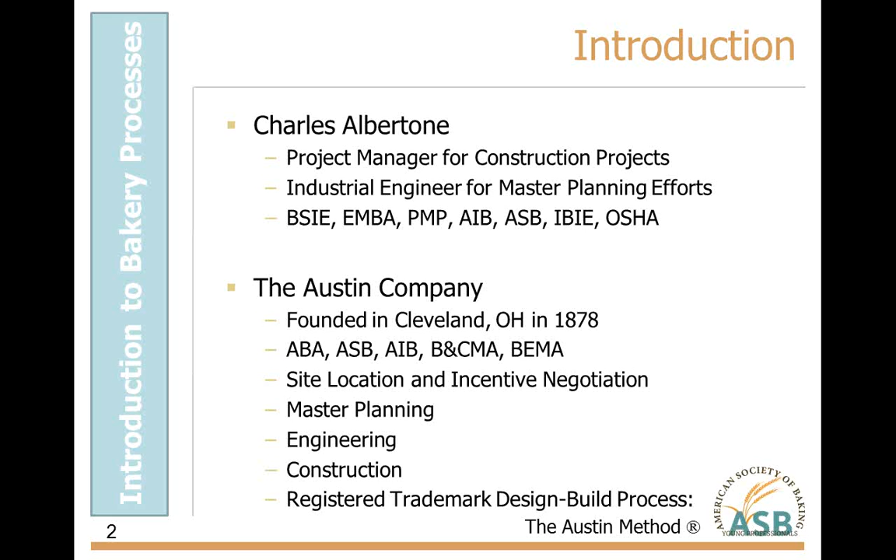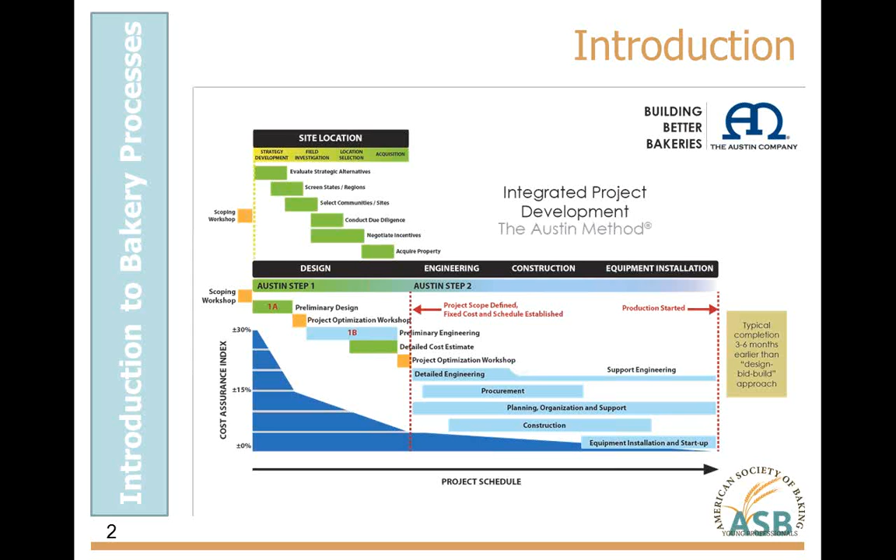The Austin Company, a few other things about it real quick. We do some site selection and incentive negotiation if you are planning on building a new facility. We will master plan that, starting with a blank sheet of paper, developing an ideal layout. Then you try to find a site or existing building as close as possible without making too many concessions. And then the Austin method that Brittany alluded to, essentially it's an integrated design build approach. It's a registered trademark process that we have, and it allows us to establish the guaranteed maximum price of a project after you've only expended up to maybe 10% of the engineering. Then we get started with engineering of items that are more critical in the field, such as footers and foundations, and we begin constructing those while we're still ironing out the final details of an office layout, for example. So it's just a way to get into the field quicker and get completed quicker so that you could start making more money.

This is a two-part agenda for today. One is going to be focusing on the bakery processes introduction, as the title indicates, and then also going to talk about construction items. Some of the key takeaways will be to understand the basic processes involved in making a bakery product, gaining knowledge on the different types of systems that can create a unique product, and introducing the fundamental ingredients and optional additives for recipes.

On the construction side, we'd really like you to gain an appreciation of the design and construction process of a standard bakery, that the site is more than just acquiring a piece of land, and designing the building is more than just creating a shell to house the process equipment. And then the actual field process itself is more than just executing the plans. It's ensuring that the sanitary details are being followed in accordance with scope, schedule, and cost for our clients. Throughout the presentation, I hope to be illustrating typical construction details to consider where applicable.

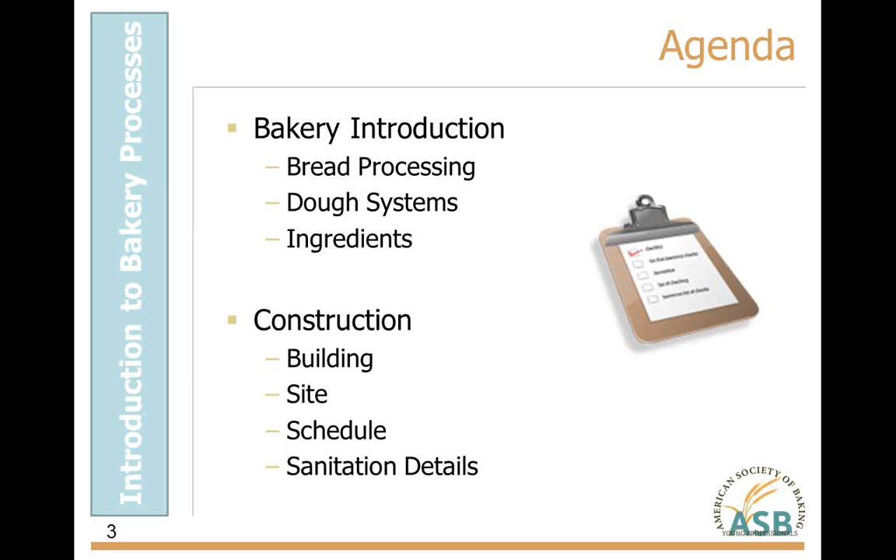Austin encourages starting any meeting with more than 3 people with a safety short, so I will be providing one for bakeries and one for construction. Starting with safety in bakeries, I'm not going to read this whole thing, but specifically the wet floors around mixing, especially after a sanitation process. Posting notice signs is helpful, but cleanup is the most crucial. And then in the packaging area or panhandling, we often see manual handling of heavy trays for long durations. We either need to account for this with equipment or robots that will lift this product for us, or having a floater position to give frequent breaks if the manual handling is absolutely required.

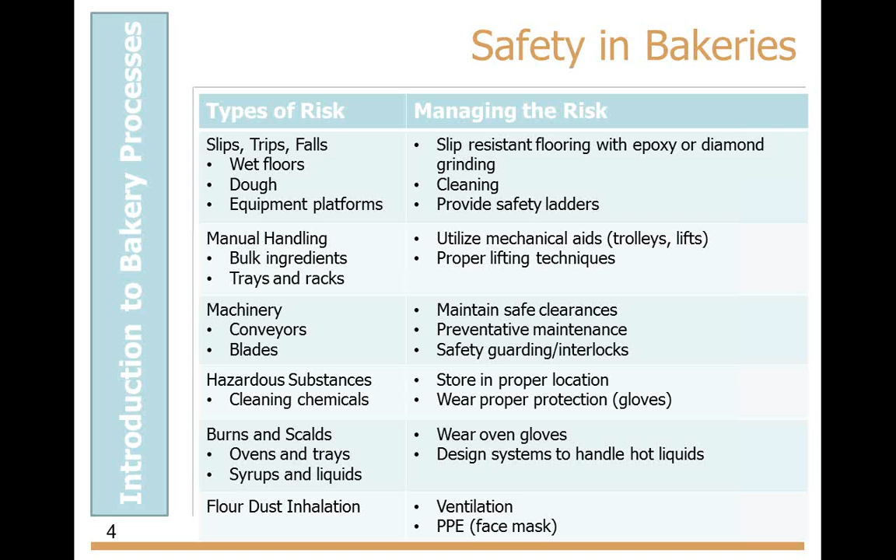Bottom line is, if you train your people, safety in bakeries can be managed.

On the construction side, this is a typical sign we would have in our construction trailers. PPE stands for personal protective equipment. You see the hard hat, safety glasses, no short sleeves, no tank tops, safety vest, long pants, and work boots. On the right, you also see multiple languages if appropriate. Additional items might be required for specific tasks, such as welding, where you might need gloves, or jackhammering, where you might need ear protection or gloves. So these are the minimum required to enter the site, but additional requirements may be needed.

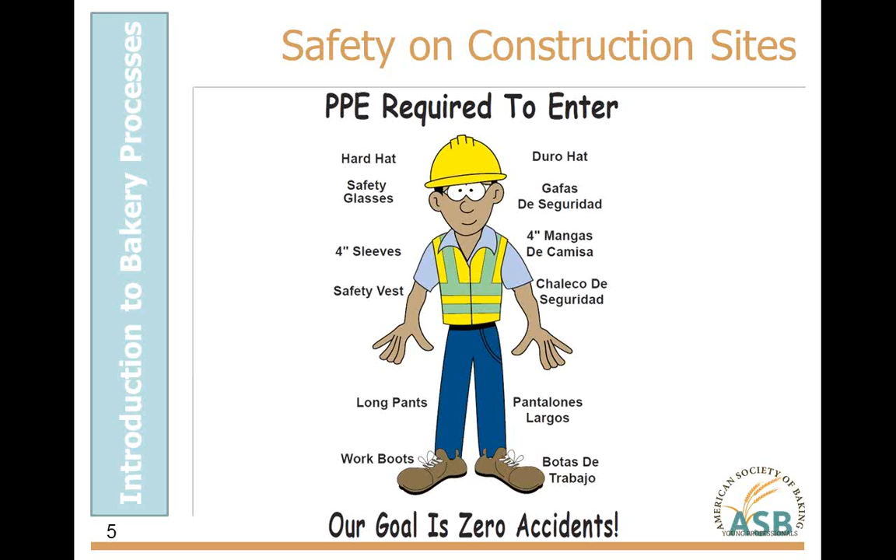Our goal is always zero accidents. We like people to go home the way they arrived. I think that's a pretty good goal that we can all share.

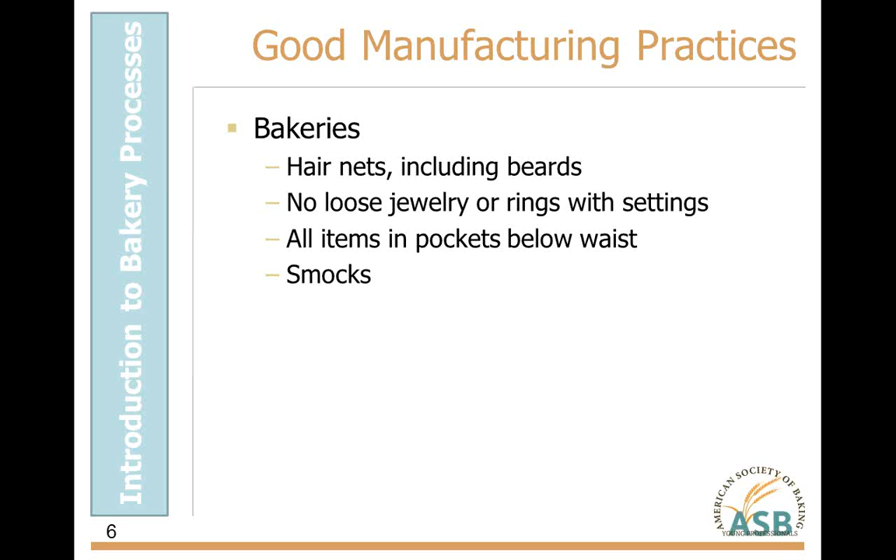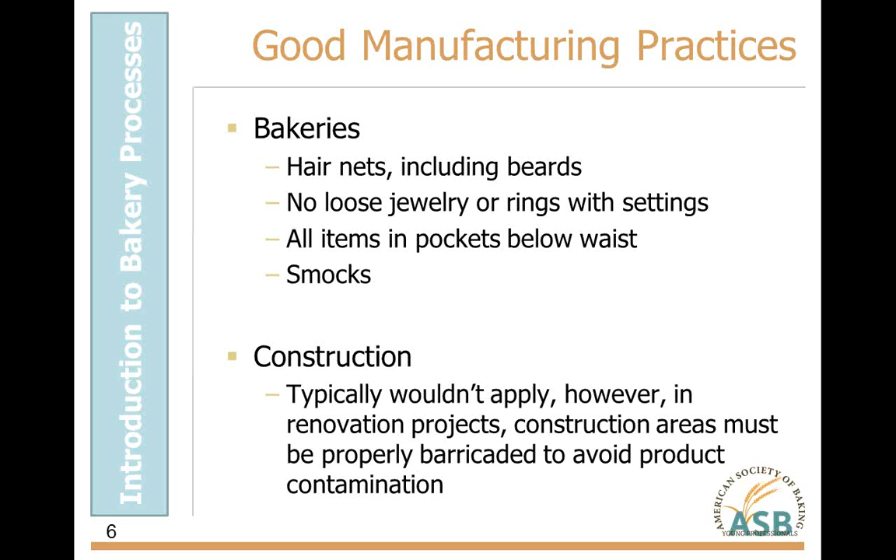Lastly, I also wanted to touch on good manufacturing practices, or GMPs. It's not necessarily personal safety, but food safety, and it avoids wasted product or, worse, bad publicity that may come with a recall. Some of the things they do in bakeries are hair nets, including beard nets if you have a beard, no loose jewelry or rings with stone settings, and all items are usually required to be in your pockets below the waist. Some bakeries even make you wear smocks or over jackets. Typically these don't apply on a construction site because you're not making product while it's under construction. However, in a renovation project where you might have a 2 or 3 line operation with some construction going on one of the lines, the construction areas must be properly barricaded to avoid product contamination. Lastly, for the ladies out there, nail polish or fake nails, if you're working on the line, are also usually discouraged, or they'll make you wear gloves. So just a couple notes there with GMP, and then we can get started into the rest of the presentation.

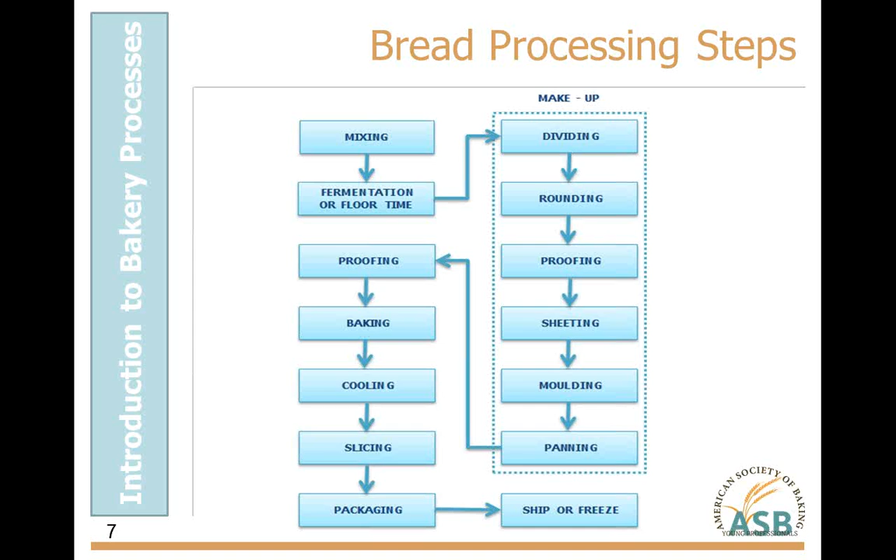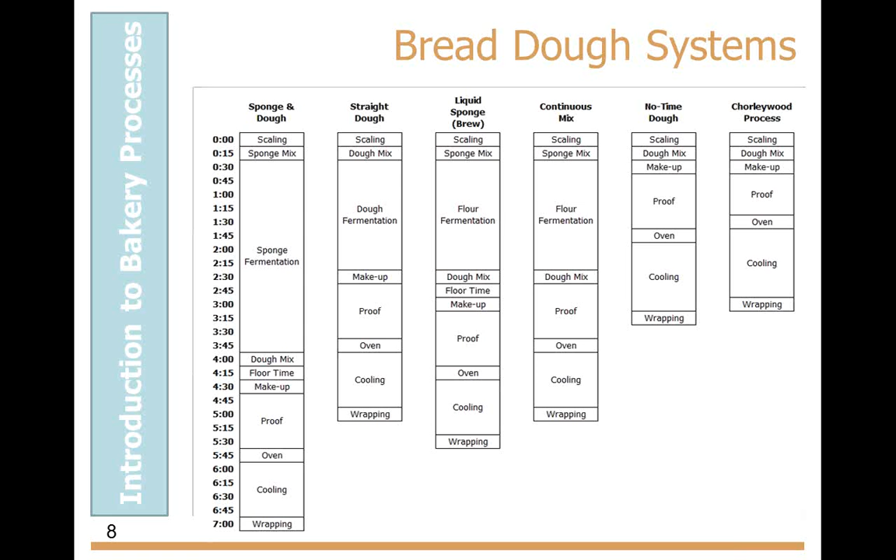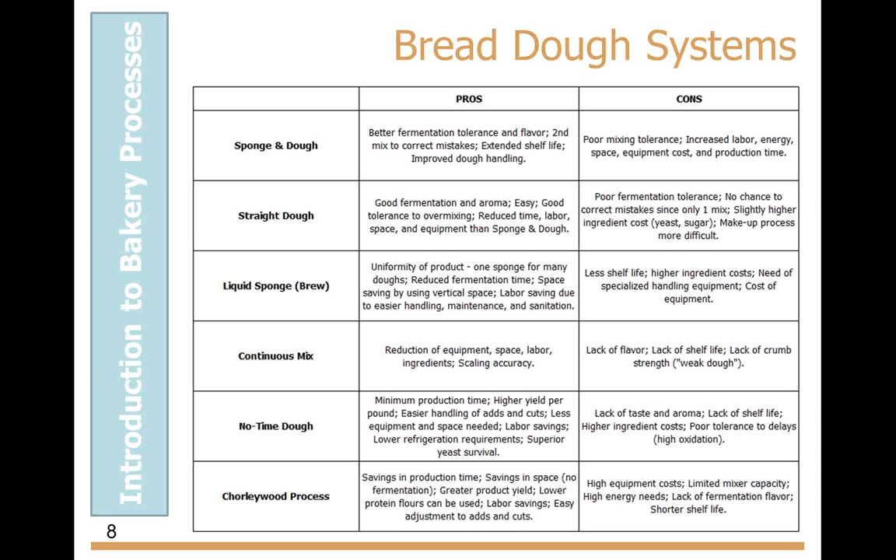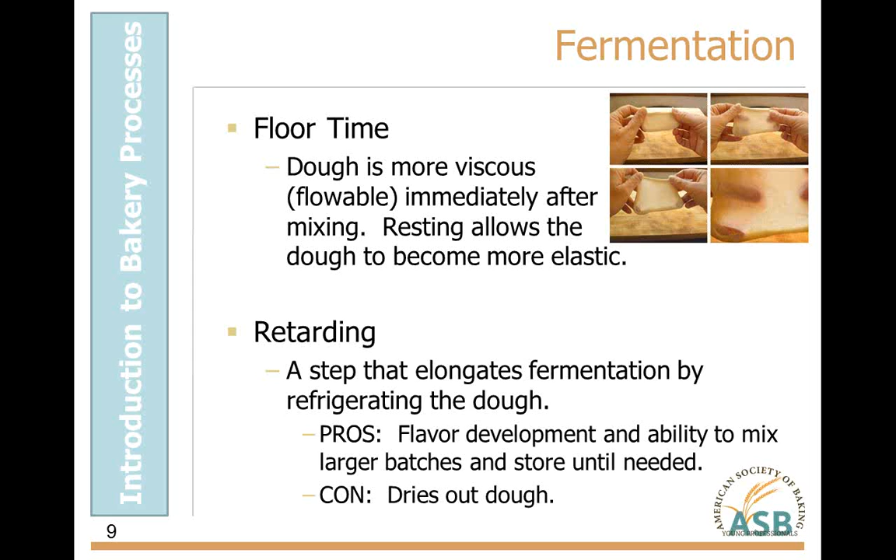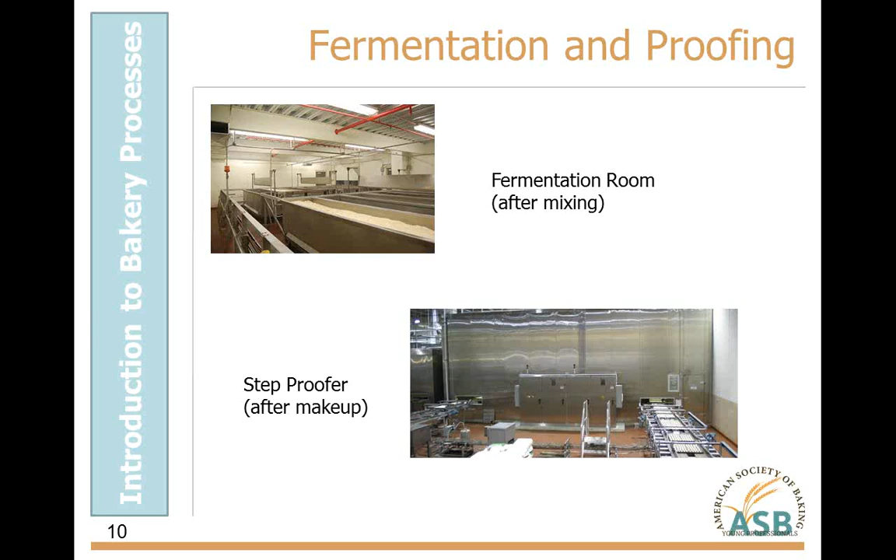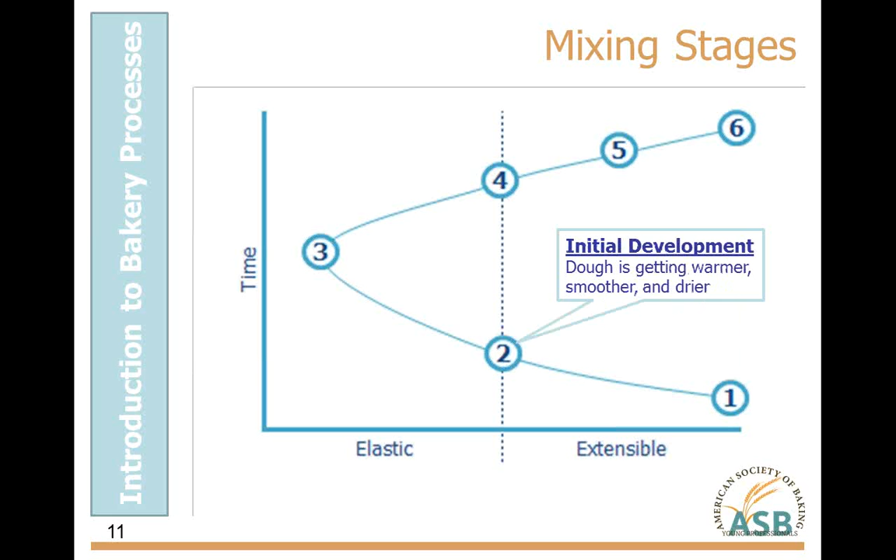I want to talk through the mixing stages of what the dough goes through as it's in the mixer. The first stage is called pickup - the dough is sticky, cold, and lumpy. As you continue to mix, it goes through initial development - getting warmer, smoother, a little drier. Then cleanup, where the dough is at its maximum stiffness - you'll even hear it slapping around the mixer, and it comes together as one mass, no longer a bunch of separate ingredients.

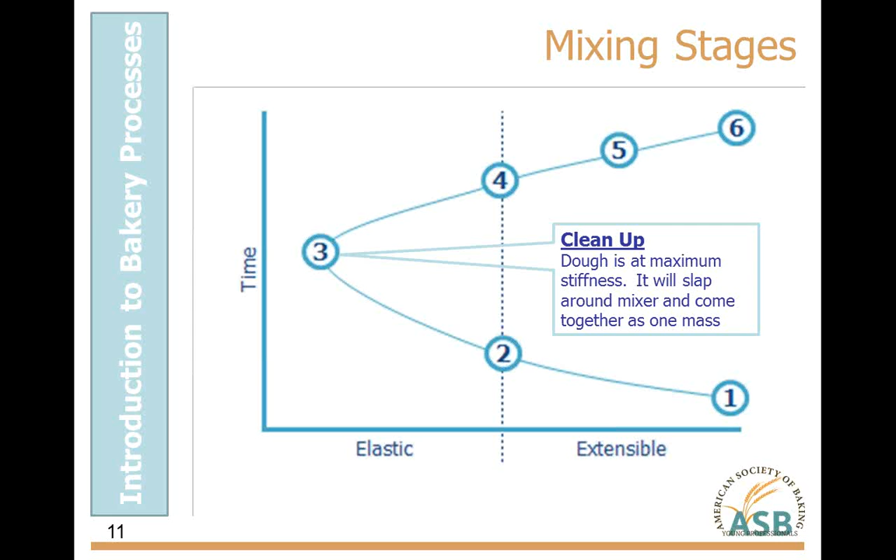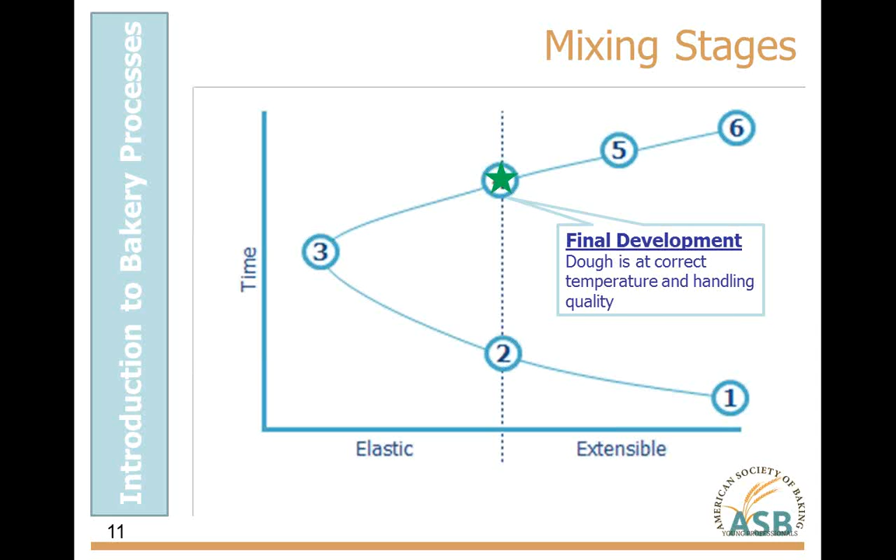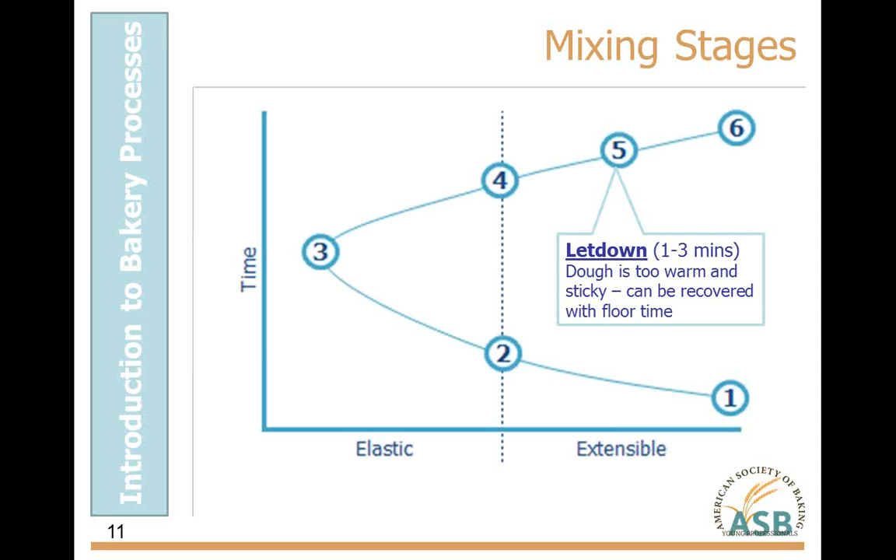The ideal stage is final development, where the dough is at the correct temperature and handling quality. If you continue to mix, it's called letdown. With about 1 to 3 minutes of overmix, the dough becomes too warm and sticky - however, it can be recovered with floor time. After 3 minutes, the dough begins to liquefy, and you've essentially lost that batch. So you definitely want to avoid overmix - that's the purpose of this slide.

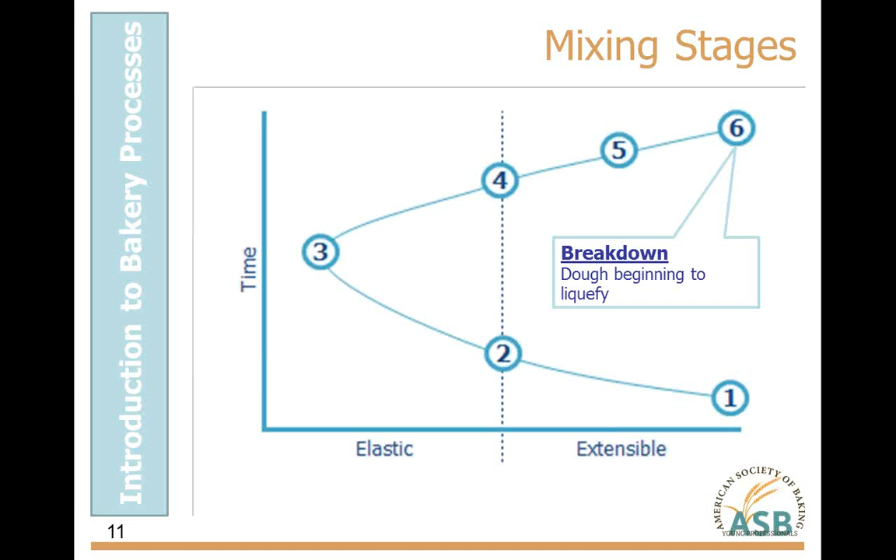Some design considerations for mixers and ovens: mixer foundations and pedestals, scale pits, overhead ingredient lines feeding the mixers - all of those are critical components for an efficient mixing operation. For the oven, you definitely want an isolation pad - you want the oven sitting on its own foundation so the floor doesn't crack due to temperature variations. You want to run all the electric underground, and the gas and steam utilities need to be located at the proper positions.

The other thing I wanted to mention about the oven is that it's often called a kill stage for all sanitation considerations. So your clean and dirty troughs or maintenance tools - you have to consider all of this in your design and plan for it. Are you going to have a trough washing return to go from finished goods back to raw materials, and sanitize that trough, or will you have one trough set for all raw product and another for all finished good product? These are things to consider as you figure out how to lay out your bakery.

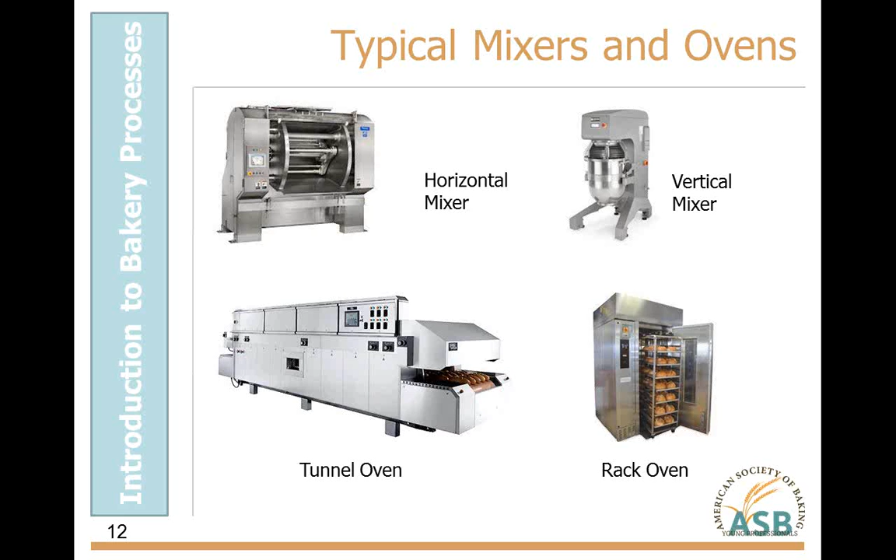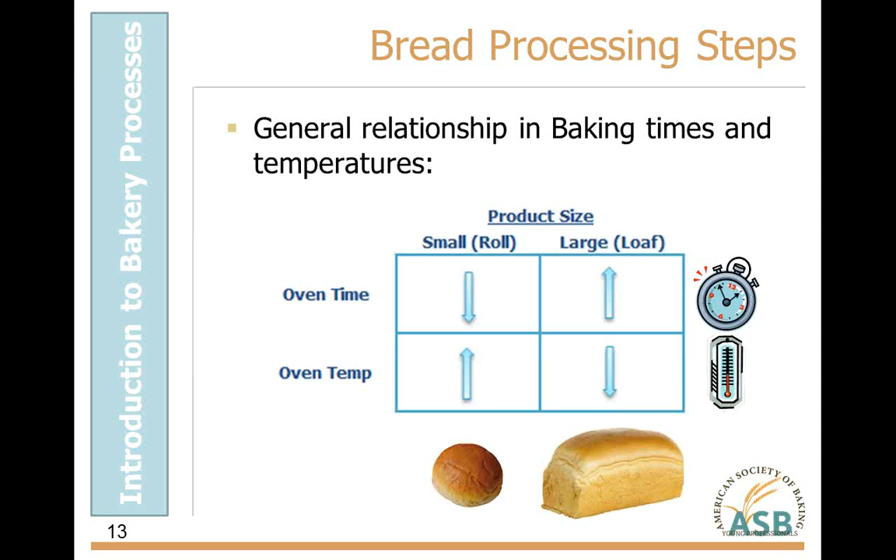Packaging is something you really have to plan for the most. It sounds simple, but you'd be surprised how often packaging equipment moves and how automation adds to not only the footprint but the need for compressed air. Compressed air is very critical in the packaging process. As is floor space, not only for automation you might want in the future, but for building pallets and cross-docking if your bakery does those functions.

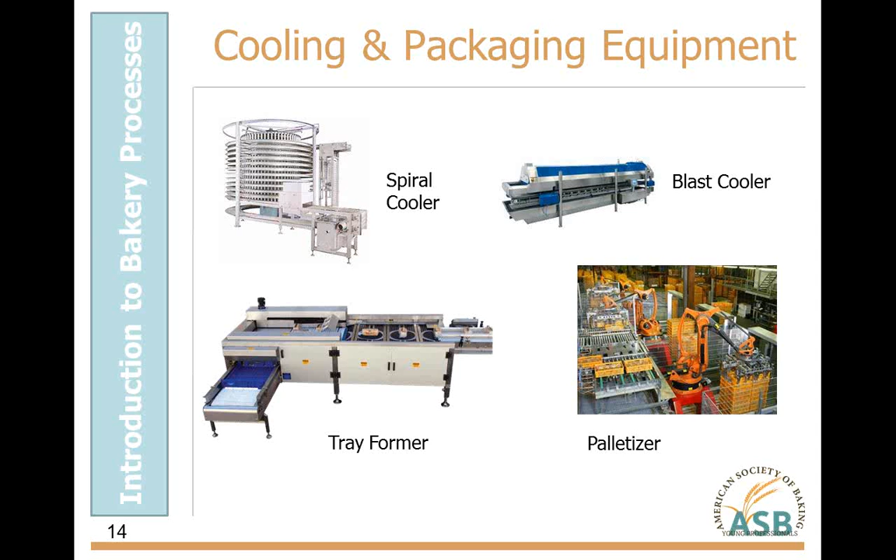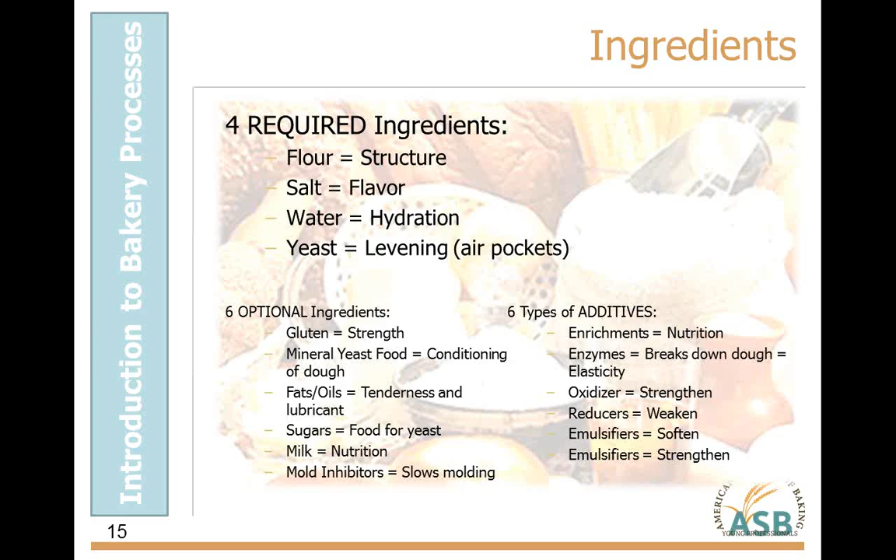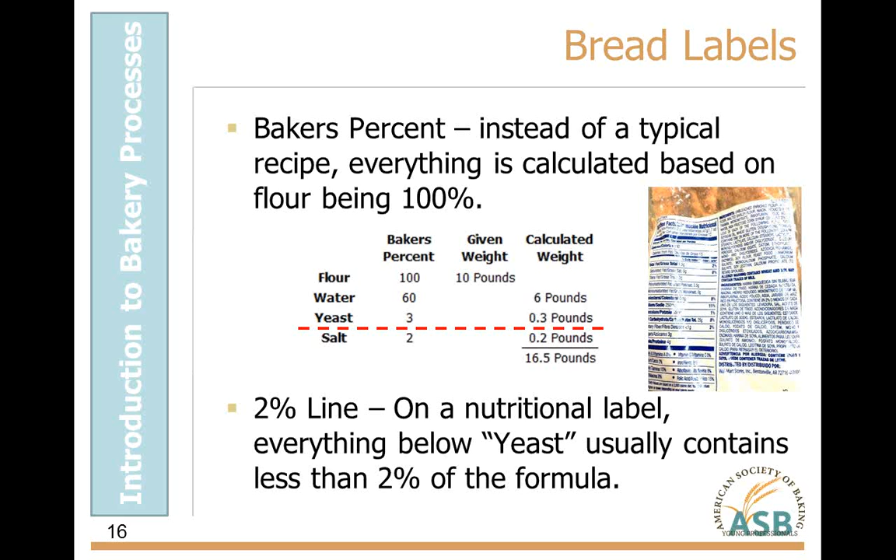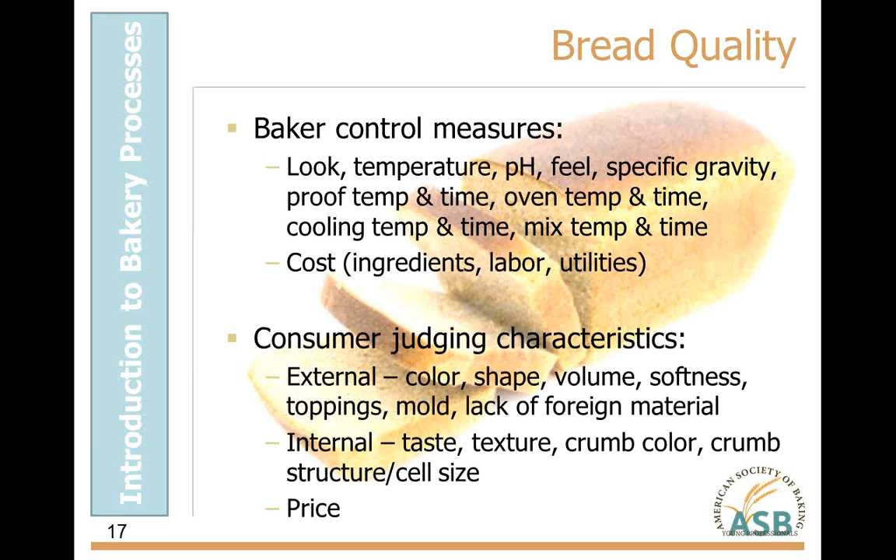A trend in baking that I thought was pretty interesting is the reuse of mixed dough into a recipe. I'll use a pita line as an example: if you're creating a round product, your laminating line will actually produce a square product, and you cut it to match the shape you need. What usually occurs is that waste goes to a side conveyor and goes back into the mix. This improves volume, minimizes waste, and improves consistency between batches.

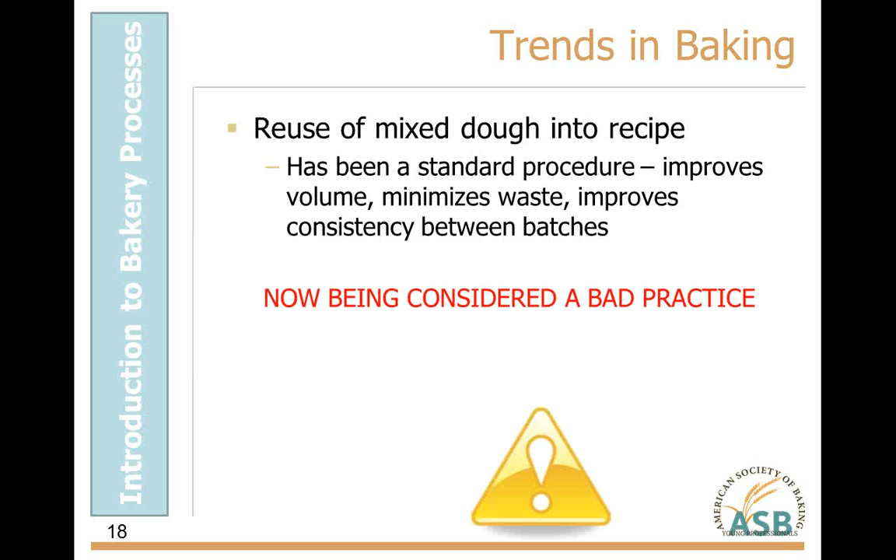However, this is starting to not be considered such a great practice for the purpose of traceability and allergens. What if there was a defect or a recall? Where would you know how to start and stop those doughs, especially if you're a 24/7 operation? There could be small amounts of dough made from the morning mix still showing up in the afternoon mix. So it's really hard from a baker's standpoint to get that under control, if this is a process you're still willing to do.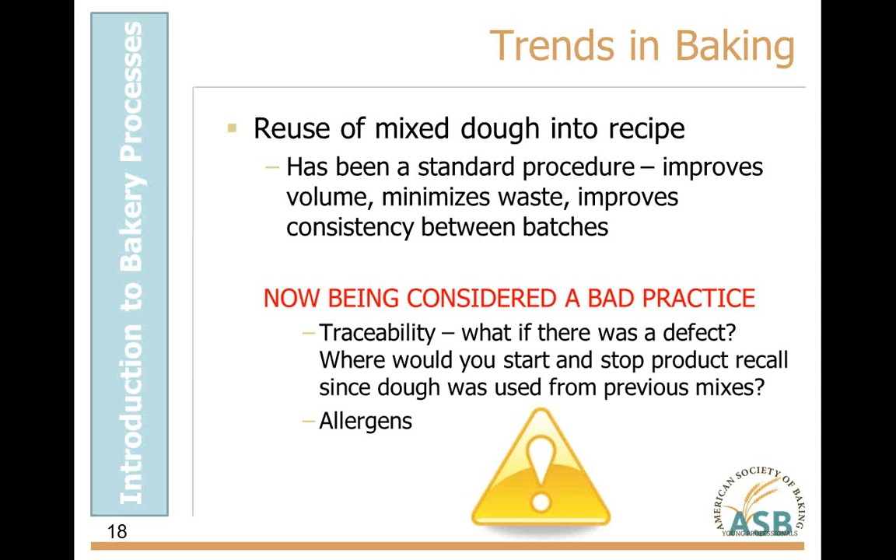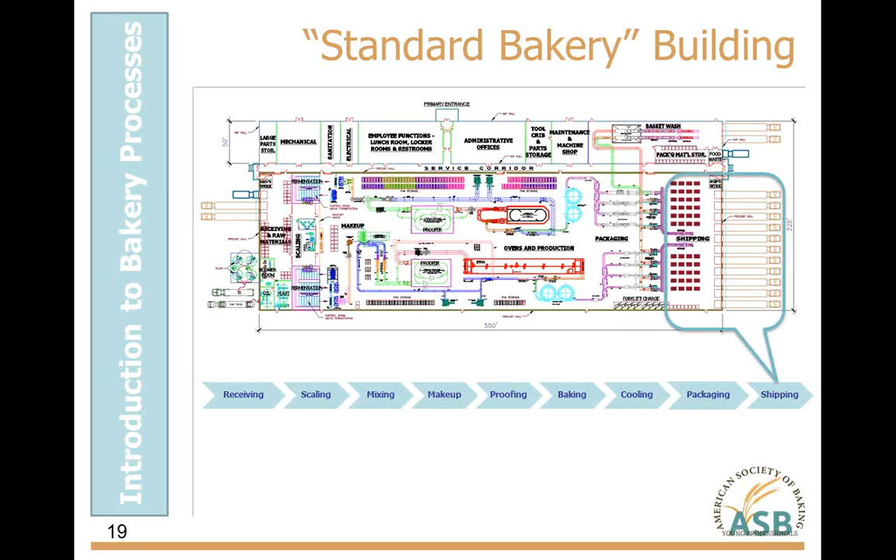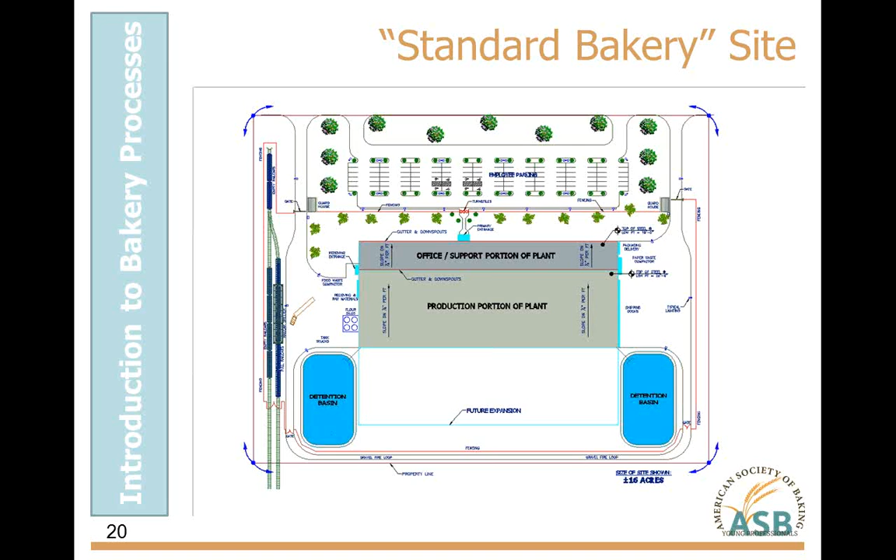And then I also wanted to show that this site was actually constructed very similar to that standard bakery site, so you could see an aerial of the things I was just talking about.

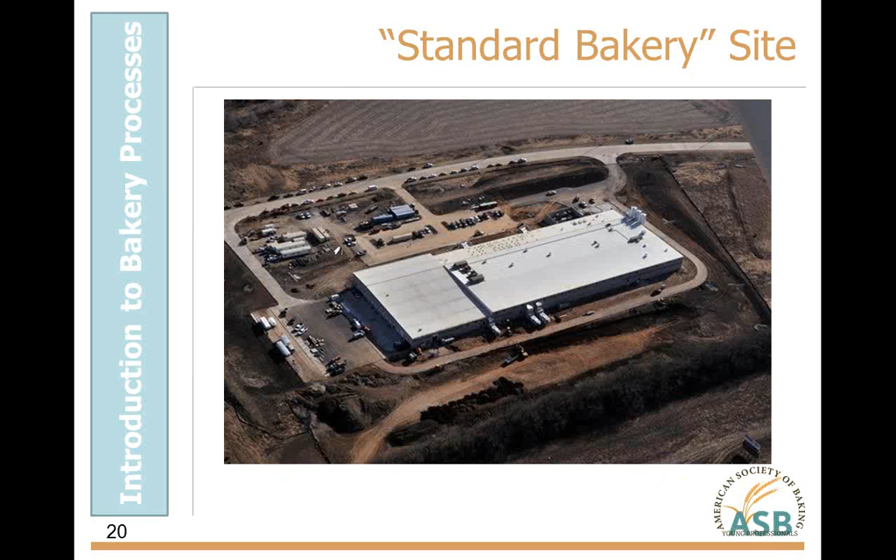All right, wanted to talk a little bit about schedule. This is going to be a 9-month arbitrary schedule starting in February of earlier this year. And I'm going to start with a Revit image. Revit is something I'll talk about in another slide or two, but it's a CAD tool, a 3D modeling tool that we use not only to create images like this, but also to interference check. I'll elaborate on that in the next slide.

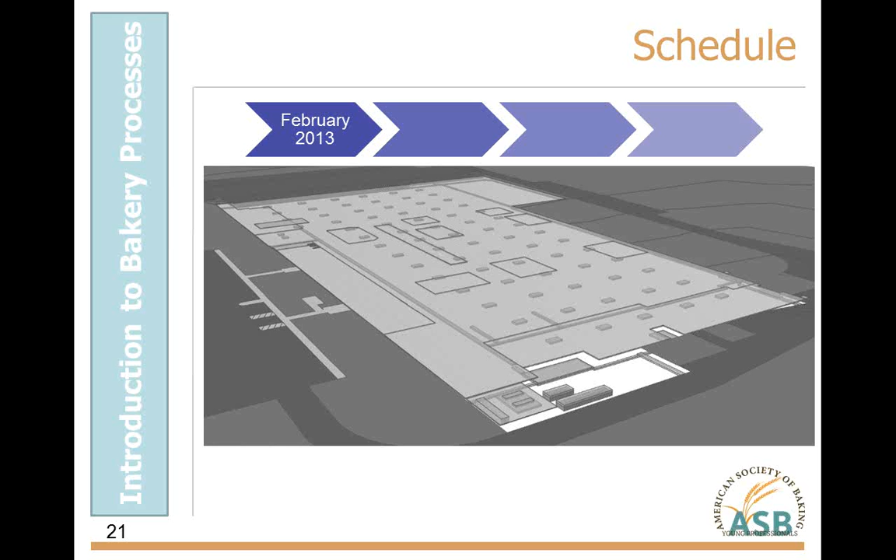To quickly go through this, the first thing that we did would be footers and foundations for this project. And again, I'm going to show you a picture of it actually during construction, so this is a photo of that site during construction.

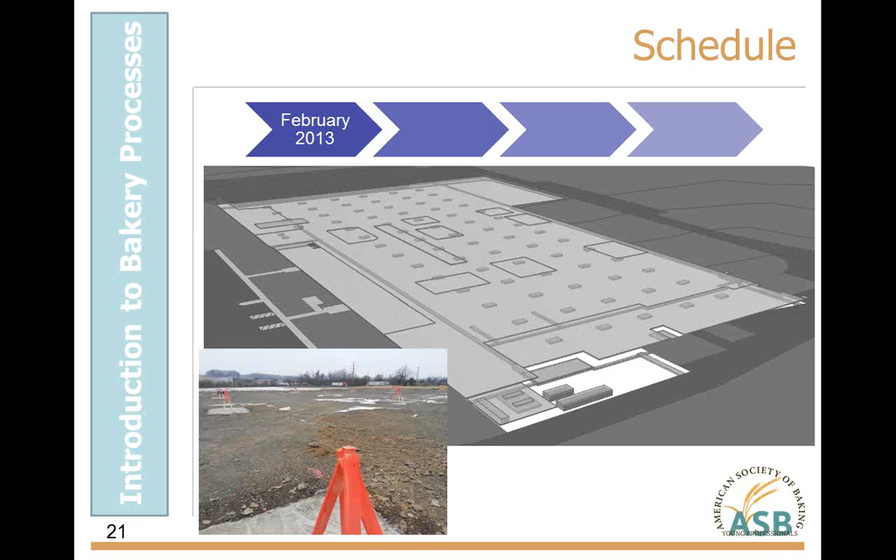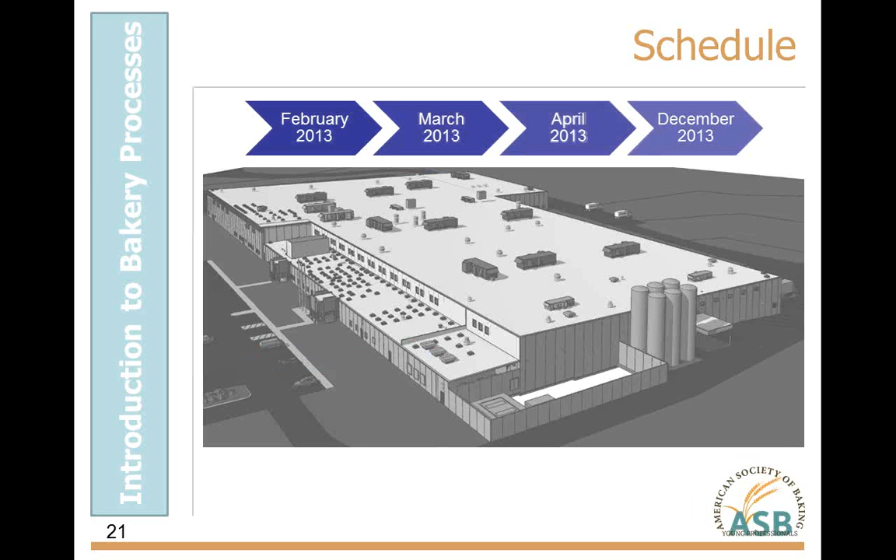The next thing you would do is tilt up the load-bearing precast, and a picture of that as well. Next would be the installation of structural steel, columns and tubes, with a picture, and then lastly you'll see the finished roof with all the rooftop equipment.

That occurs, like I said, about 9 months into the schedule, and there's a picture of that. Notice that the roof is white, what we call TPO. It's an insulated roof, which reduces the bake shop temperature by 10 degrees, qualifying for energy efficiency for green or LEED certification, whatever you're trying to obtain.

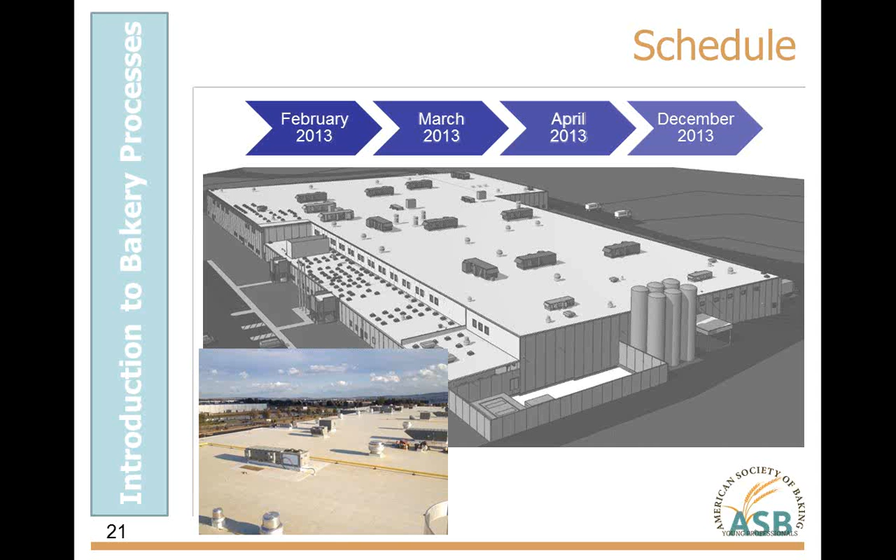The only thing with white, and you'll see it on the next slide, is that a lot of bakeries like to have everything white. It requires a little bit more maintenance or cleaning in this case, but in a bakery that's not necessarily a bad thing, since it helps with recognizing areas that need to be cleaned before they become problematic.

So to talk a little bit about the interior, the structural steel and roof design, this is a Revit rendering again. Tube columns and joists, so there are no crevices. An IMP ceiling and roof, so it's flat, smooth, and cleanable, and those are actually anchored directly into the tube, so there are no screws or fasteners exposed, nothing to cut your hand on, nothing to build a harborage point either.

As I mentioned, Revit is great for interference checking between disciplines. A lot of companies don't have everything in house. Austin does, but perhaps you're using a structural engineer and subbing out the mechanical engineering design to somebody else. They might give you both files saying here's the structural design and here's the mechanical design. What Revit will do is interference check, and you might find a steel column going through an HVAC duct, for example. So Revit is very good at identifying those things before they become issues in the field.

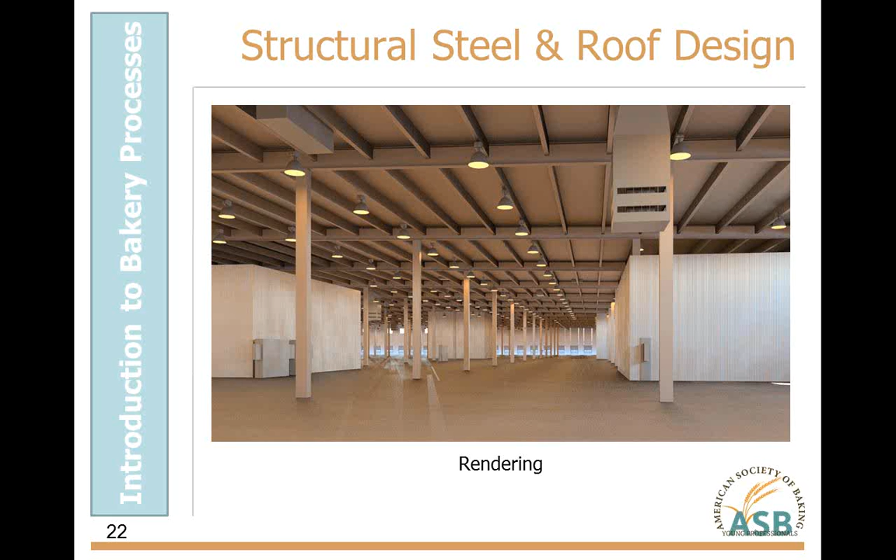My next click here is going to show you a similar view of an actual construction site, and you'll see how much brighter it is when it's all white. But this is actual construction.

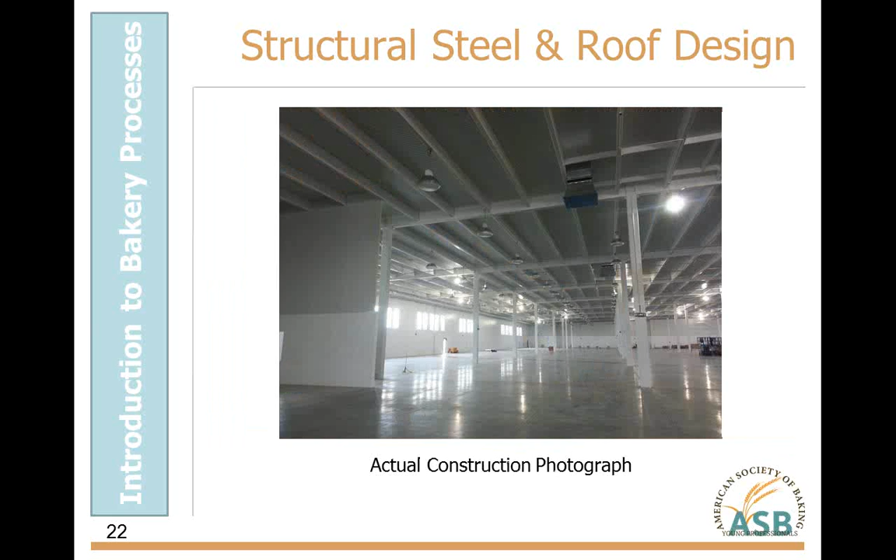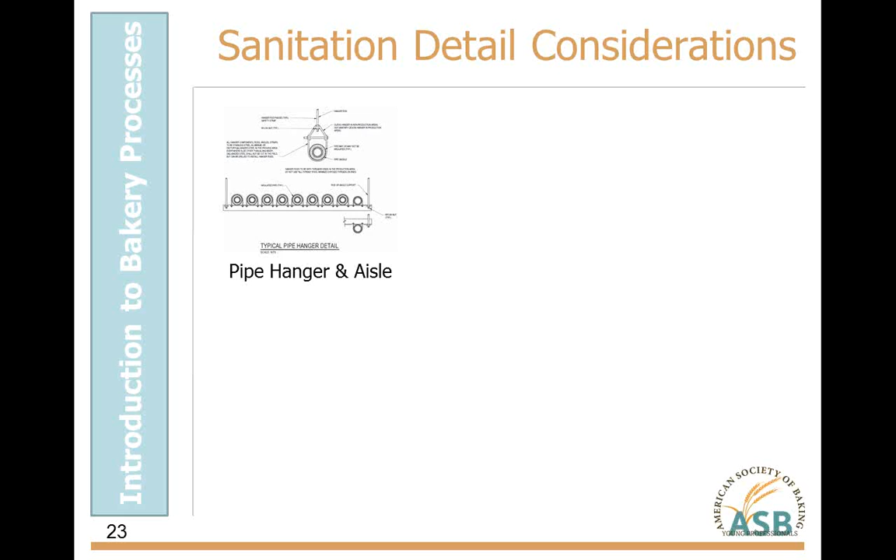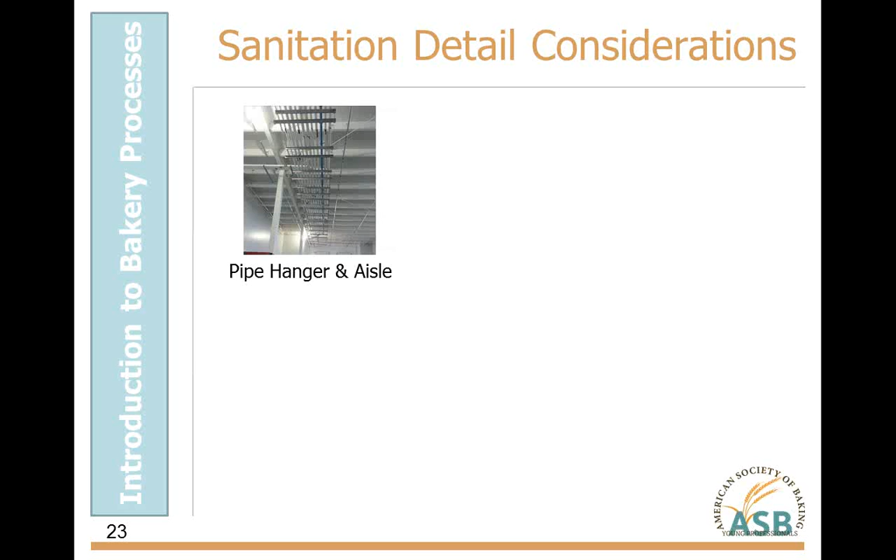All right, a couple sanitation detail considerations to conclude with. For pipe hangers, what we do is say no threaded rods - again, that's not good within a bakery. And this would be an example of the pipe aisle I was talking about earlier. You want a coordinated area, not only to design your structural steel around, but just to make it a cleaner appearance.

Also, this is the sanitation room I referenced earlier. This would be a room you'd have to pass through prior to getting into the bake shop from any dirty area. Some of these rooms might have requirements that won't let you through unless they know the faucet has been on. This particular situation doesn't have that, but hopefully after you've passed five faucets, you've washed your hands and dried them thoroughly prior to entering the bake shop.

Vertical storing dock levelers are safer than typical dock levelers in some of the older facilities. They don't require manual operation, somebody bending over and lifting up a heavy plate. They also store upright so a forklift can't drive through an open door if that's the situation. With regular dock pits, you have a lot of crevices and harborage issues. Here is one long, recessed pit that is easily cleaned, doesn't have any areas for pests to hide or reside. So again, this is something we strongly consider.

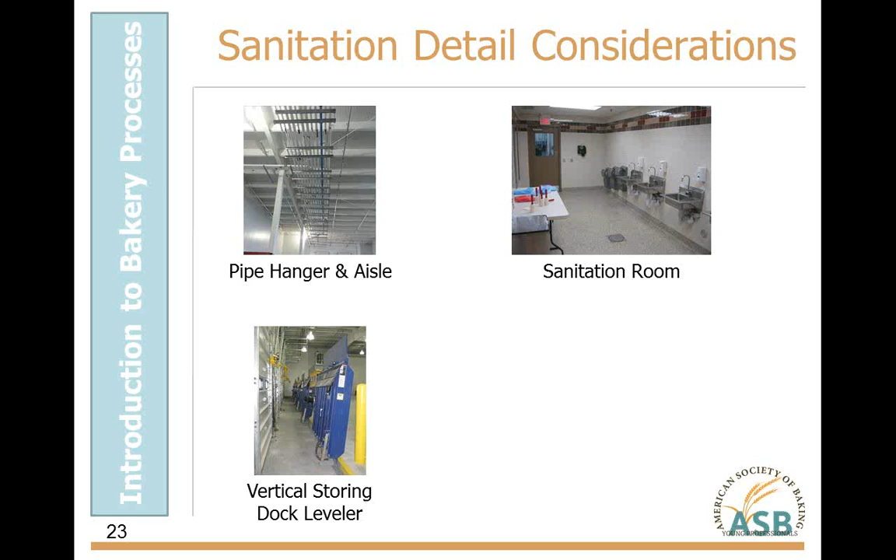The other thing that is critical within a bakery is standing off of pipes or electrical panels. The standoff provides space to effectively clean. You want to use underground conduit as much as possible. If for whatever reason space is an issue and you need the enclosure up against a wall, that's okay - it just requires a seal, a caulk around it, and it's pretty difficult to obtain a tight seal on a completely flat wall for a long duration. It's kind of a maintenance item the bakery always has to be aware of.